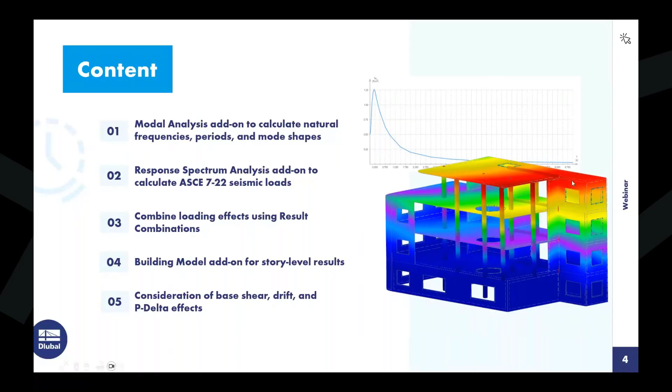So with that said, we will immediately begin within our RFEM 6 program today. When you do create a new file, you are presented here with the base data dialog box where we give it a model name. The type of model will be in a 3D environment. And under the second tab, these are all of the various add-ons that we have available in the program.

For those of you joining us today who are not familiar with our program setup, RFEM 6 is the base program that allows us to fully model our structures where we have access to all the cross sections and materials from all the various standards. We can apply loads and we can run a full static analysis. But when we need a more advanced analysis, like for example today with dynamics, we would need the relevant add-ons.

If we wanted to carry out the design according to the various materials listed here, as well as the design standards, then we would need to activate these design add-ons. So more or less, you create a software package that's specific for your particular design needs. So for today, we will begin without any particular add-ons. We want to work initially within the base program alone.

We will generate the load combinations here according to the ASCE 7, the latest 2022 standard. Notice we also have the NBC standard available here within our dropdown.

For the sake of time, I have already modeled our structure that we will be working with today, but I do want to go over a quick model review. So this is a reinforced concrete structure. We have the material 4000 PSI assigned to all elements that you can see here.

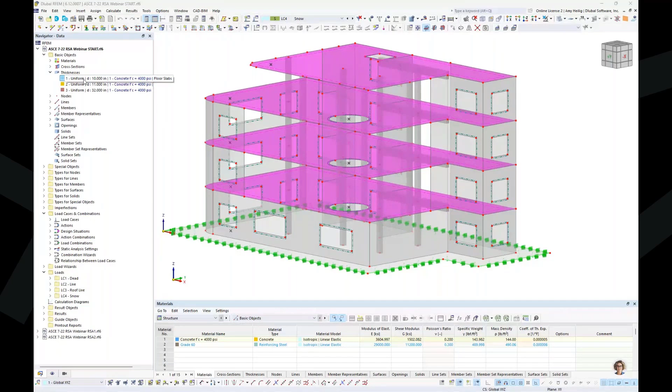So the elevated slabs have a thickness assigned to them as 10 inches, as well as that same concrete material, 4000 PSI. The wall elements are going to be a thickness of 11 inches. And finally, we have our slab on grade element down here at the base of the structure. This is going to be quite a bit thicker at 32 inches thick.

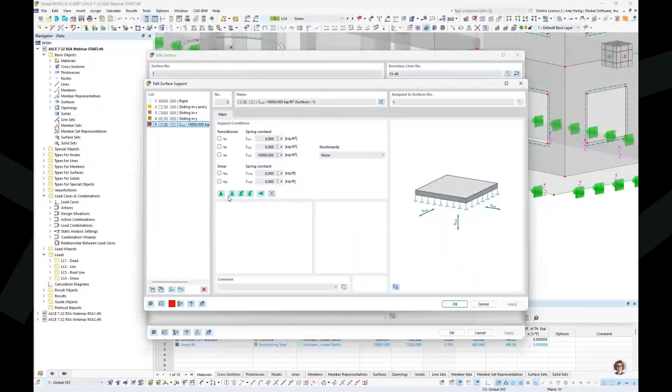Now, we also have our support conditions. So I went ahead and applied a surface support to our slab on grade here, and this is just going to represent the soil stiffness. You can see here, this is applied only in the Z direction with a spring constant here set pretty high. All the rest of the degrees of freedom are released for this simple example. So this would be the information that we would get directly from the geotech engineer.

Now, in the lateral directions, I did apply a line support here only at the boundary lines of the slab element itself. So if we take a look at these particular line supports, you can see that I have restrained them in the lateral X and Y directions.

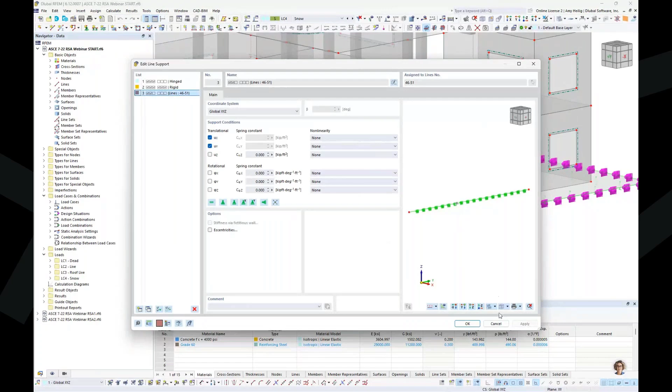All other degrees of freedom are set to release. So this all just depends on your project, and of course the support conditions can vary.

Now that we have reviewed the model, let us take a look at the loading. Within the drop-down box at the top, I have a few load cases already defined where we can take a look at the loads applied to the structure.

For our dead load, we have a simple surface load applied at each level. Same concept for live load, just with a modified magnitude at the lower levels. We also have a roof live load, again accounting for the openings here. And finally, we have a snow load.

With all of these load cases, we are going to take a look at them within our Load Cases and Combinations dialog box. We'll actually be within this dialog box quite a bit today.

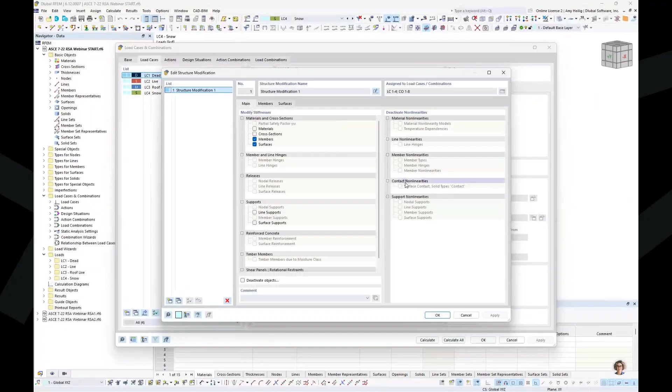One thing I wanted to point out with the load cases: I have an additional structure modification applied here to each load case. This is specific to the ACI standard for members and surfaces, where we can apply the I-crack factor for reinforced concrete to reduce the stiffness for our analysis, again required by the code. I'm not going to go into much detail with this today. We do have previous webinars on both the ACI and the CSA A23.3 that you can refer to.

Now that we have our 4 static load cases here, I'm going to make a copy of my existing dead load case. The reason I want to make a copy is I want all of the loads already applied under the dead load case to also be applied here in load case number 5, which will have a new load case name for our vertical seismic.

I'm not quite ready to jump into the response spectrum analysis yet, but I am going to apply the seismic loads as a static load type to begin with. So we can rename this one to vertical seismic.

I also want to specify here directly from the code, section 12.4.2.2, and in particular equation 12.4-4A, exactly the equation that I will be applying for this load type. So referencing this equation from the code, this will be a factor of 0.2 multiplied by SDS, multiplied further by our dead load. Again, the advantage here is that we are just going to apply a static analysis.

I do want to modify the action category to earthquake load vertical. This just tells the program how exactly we want to combine the load case with the other load cases here based on the ASCE 7.

But the self-weight was automatically copied over here as well. So this is part of our dead load to consider within this equation, taking into consideration the 0.2 factor, and for my example today, the SDS is going to equal a value of 0.72. I multiply those by the negative 1 factor for self-weight. This gives us a value of 0.144.

Now, if you remember too that under my dead load case, we also had an applied additional dead load at each of the story levels that we want to consider for the vertical seismic. So I'm going to select all of the elements within the graphical view here, and we want to double click on this surface load itself to make a modification to the load magnitude.

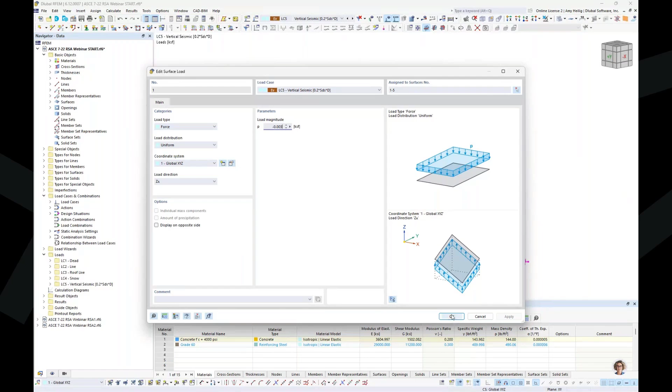Again referencing the ASCE equation, we will take into consideration the 0.2 times 0.72 multiplied by this initial dead load, 0.02, and we're going to get a value here of negative 0.003. So a very small load to consider in the vertical direction. That vertical seismic load is complete.

So you can certainly use the base program alone, RFEM 6, to apply any seismic loads as a static load type if you prefer. But now we want to move into the horizontal, or orthogonal, seismic loads, and this is where we want to activate those particular add-ons.

What we're going to do is visit the Base Data dialog box, which we can access directly within our quick tools. And under the add-ons, as we revisited at the beginning of this webinar, we can go ahead and activate the modal analysis and the response spectrum analysis. So when I click OK, I am going to go back into my Load Cases and Combinations dialog box.

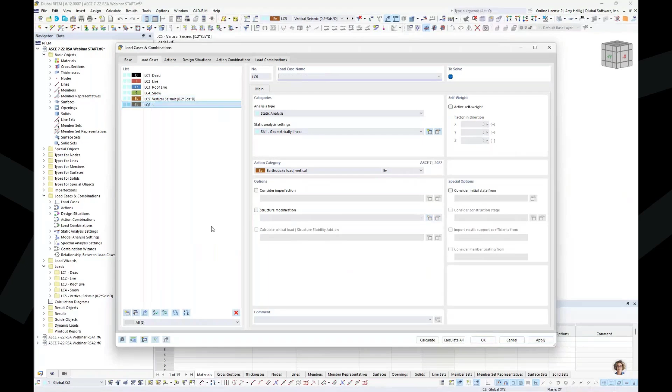We'll begin first with a new load case here, which we'll give the name modal. The analysis type is going to be set to modal analysis. This is available to me because I have activated that specific add-on under my base data.

We'll move through the various settings here. Looking at the modal analysis settings, the method for determining the number of modes is by default set to user defined, which is what we'll use today. Alternatively, I can set the effective modal mass factor to something like 90%, which is required by the code, so the program can determine how many eigenmodes are required. This option is also available for natural frequency. Moving forward today, we will select 10 modes to solve for our initial modal analysis.

As for the method for solving the eigenvalue problem, we've selected the Lanczos solver, available by default. This allows pretty quick convergence and calculates the lowest number of eigenvalues. Alternatively, if we use one of these other dropdown options, you'll see that the root of the characteristic polynomial is the only solver available. With user defined, we also have the subspace iteration. I won't go into detail on these solvers, but you can click the info help button in the lower left, which takes you to the online manual for RFEM 6 to explain the solver types in more detail.

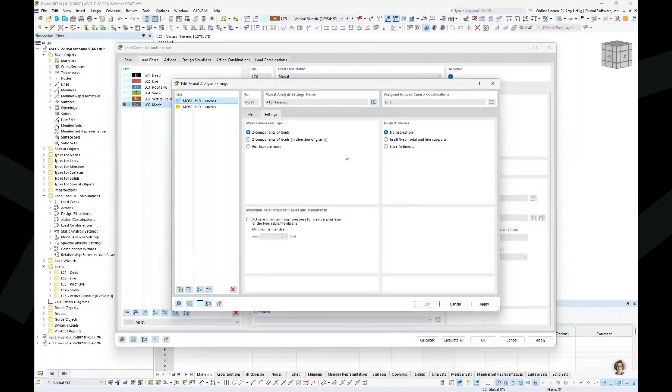Over on the right, we have the ability to neglect masses. I'm not going to neglect any masses right now, but we'll revisit this in just a minute.

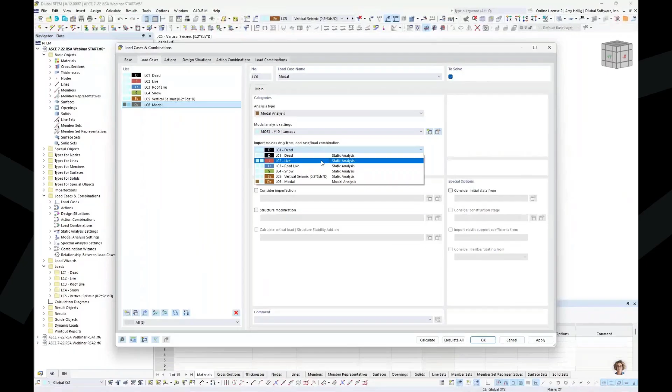Now that we have those settings applied, we have the ability to import masses from a load case or load combination, and you'll see only my relevant load cases are shown. But referring to code section 12.7.2, we're given the effective seismic weight that combines several load cases into a mass combination. We certainly could create this mass combination manually, but we want to take advantage of what the program can automatically create for us instead.

For this, I'm going to jump to the design situation, which is normally used to generate our load combinations. You can see 2 design situations were created for our factored and unfactored load combinations, and we'll get into that topic later on. Right now, I'm going to create a third design situation, and in my dropdown box, I'll scroll all the way to the bottom where I have the option for effective seismic weight.

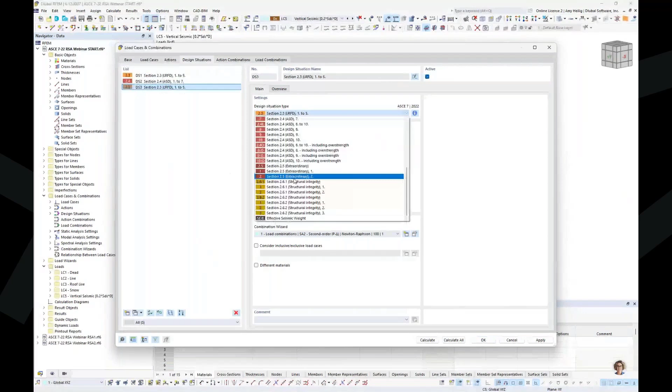This references ASCE 7 directly to create that mass combination for us, considering dead, live, roof live, and snow. Now when I jump to the load combinations, we can see the mass combination generated automatically. The problem here, though, is that I don't see the roof live load considered.

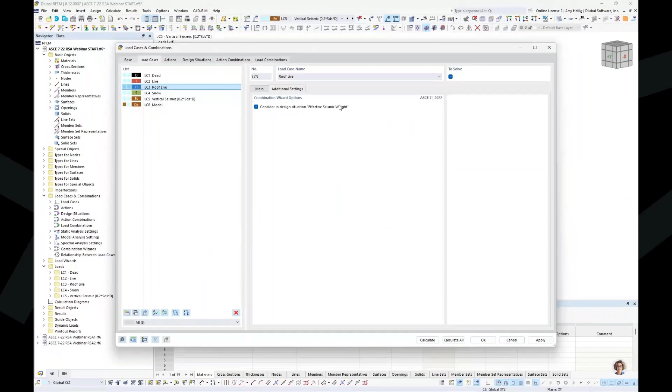The reason for this is that the roof live load could be optional within the code, depending on our project or specific settings. So under the load cases, if you visit the roof live load, under the additional settings we have a checkbox to consider it within the effective seismic weight mass combination. Now the program will regenerate that mass combination for us, and sure enough, we see all the relevant load cases with the applied factors that will be used for our mass conversion.

So going back to the modal analysis, we can now use our drop-down box to select that mass combination directly. Okay, so now that we have created all of the input settings for the modal analysis directly, we can go ahead and just run this calculation quickly.

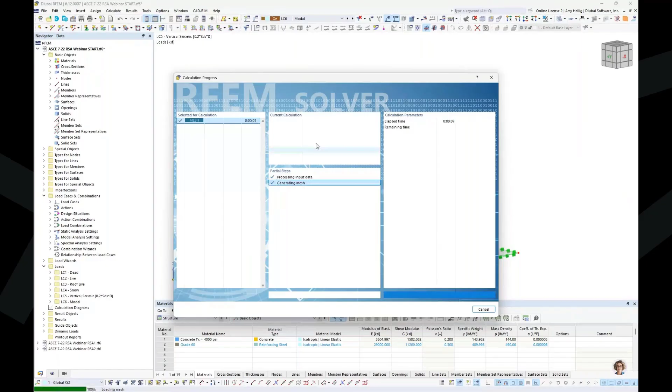You'll notice the first thing the program does is generate the mesh for all of our elements in the background. Considering all of the openings, the mesh looks quite nice. Then we calculate through those 10 different eigenmodes that I had set within those settings, so the program will take a look at the natural frequencies for each one. We are converting the masses from that mass combination to take into consideration with the modal analysis.

Once this calculation is complete, we are presented with the results. We might make some modifications here graphically just to better see our results. For example, we can turn off the FE mesh up here within our quick tools. Also, the members are represented by one-dimensional lines. If we want to change that, over here within the navigator, we can select the members under the deformations to change these to cross sections rather than single line elements.

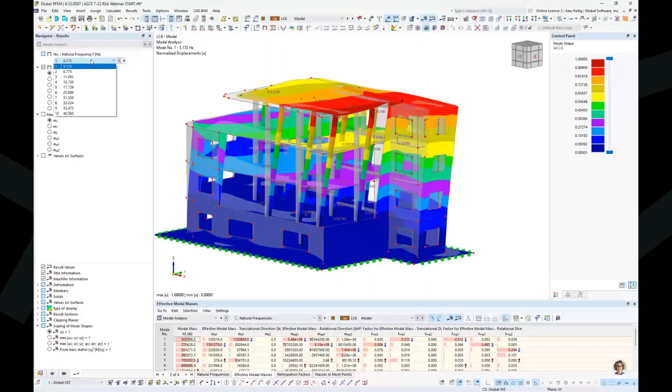So currently we're viewing the mode shape, and within this dropdown we can take a look at the 10 different mode shapes we have solved for, and we'll see the structure response adjust accordingly. The scaling of the mode shape is also set down at the very bottom of our navigator. By default, we scale them to a factor of 1.0, considering the translational directions, but you could make modifications to this if you see fit. Again, we probably won't—we'll typically leave this as the default scaling.

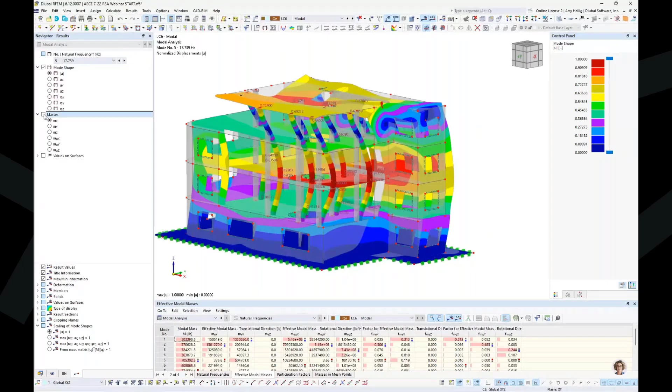So in addition to the mode shape, we can also activate the display of our masses. And if I zoom in and maybe turn this into wireframe view, we can also decrease the size of the masses. This is showing us at every single FE mesh point exactly the masses we are considering for this modal analysis from that mass combination.

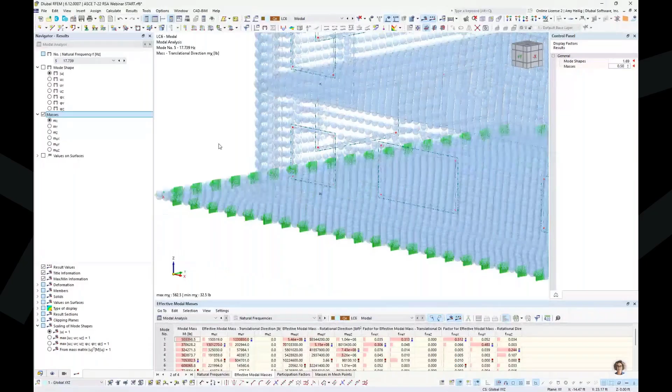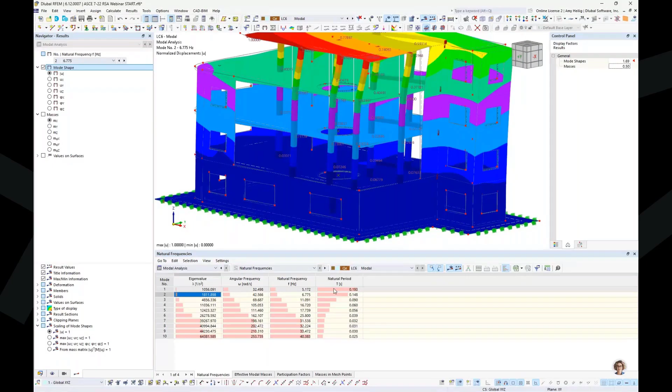In addition to our graphical results for the mode shape and displaying of the masses, we also have our table results. We use our dropdown to set this to the modal analysis, where those 10 different mode shapes are shown, along with the relevant angular frequency, natural frequency, and natural period. The second tab is going to be very important for us because it tells us our total mass participation for those 10 different mode shapes.

So when I look at the mass participation in this last row, in the X direction it's 57%. In the Y direction it is 55%. And when we refer to code section 12911, this tells us we need to meet a minimum of 90% mass participation. So we're quite a bit away from this value.

So there are a couple different approaches we can take to modify this to try and reach that 90%. The first is to simply solve for more eigenvalues. The problem, though, is that we have a pretty thick slab here with not only self-weight, but also the additional applied loads to this structure, and that mass is feeding directly into these supports. So for this particular structure, it's going to be hard to reach that 90% when we are considering this slab.

So this might be a scenario where we want to deactivate the mass from the slab element directly. Now, this could also be useful if you have a structure with a lot of members and a lot of what we call local modes with not much mass participation going on. Perhaps we want to deactivate the mass from those individual elements and instead kind of bunch them together into a single mass.

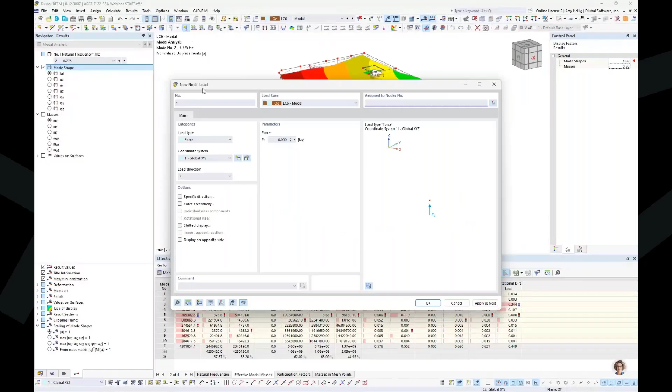We have what we call mass loads available as well. So up here within our tools, we have the ability to always apply something like a new nodal load set as a force, but in this dropdown we can always apply a mass load as well, and this would be taken into consideration within this modal analysis. This is available not only for point loads, but also member, line, or surface loads.

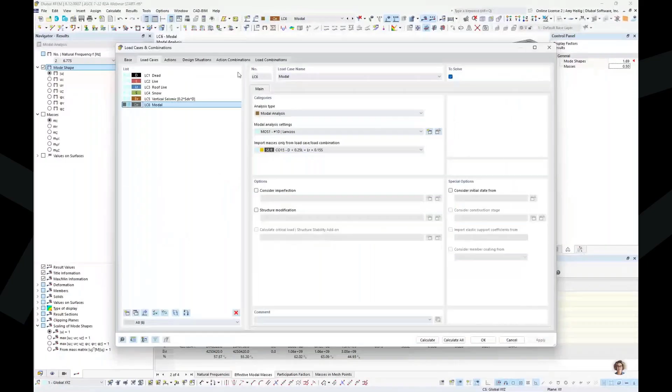Now, again, for our example today, what we're going to do is jump back to the modal analysis, and we'll go back to the settings here where instead of neglecting no objects, we want to change this to user defined.

I'm going to select a surface element and graphically select this slab. This is surface number 1. I could directly type it in here as well.

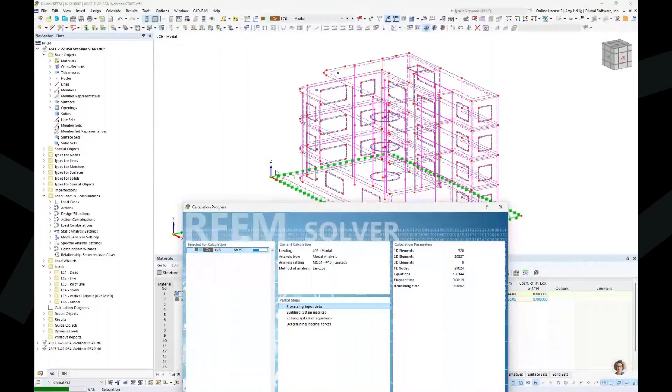We will neglect the masses in all directions. I click OK, and the program tells me it needs to delete the results, since essentially I want to run through this calculation again. This is identical to what we calculated previously, so the program doesn't need to regenerate the FE mesh. We did not make any modifications to the geometry of the structure itself, but rather the only thing we did was neglect the mass in that slab element—so self-weight, dead, live, and any other applicable loads that were converted to mass.

We are still solving for a total of 10 different modes. So once this is done with the calculation, we immediately jump to the table and we see here in the X direction, we have 94% mass participation, and in the Y direction, 91% mass participation. That looks quite good—that's exactly what we want to meet at a minimum, so this is sufficient for our modal analysis.

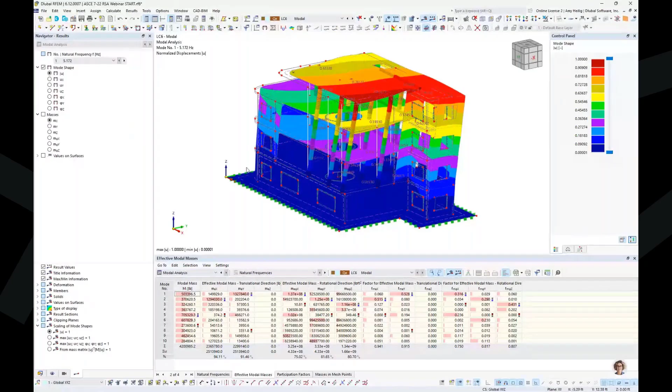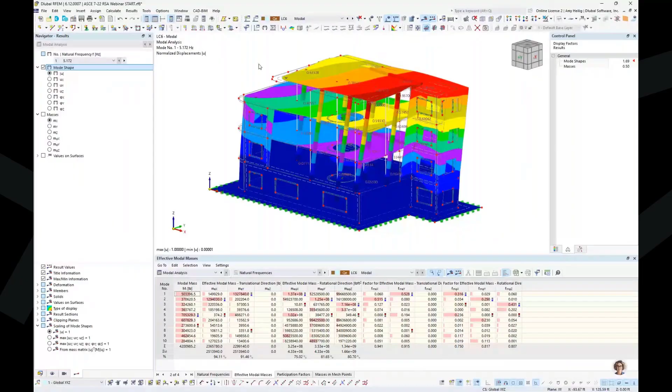What else you could verify is if we activate the display of the masses, you'll notice we have no masses now on our slab element. So now that the modal analysis is complete, we have the required mass participation of 90% in the orthogonal directions. We want to move forward now with our response spectrum analysis.

Before we create this new load case for the response spectrum analysis, I'm going back to this base tab where we generate our load combinations according to ASCE 7, but we can activate the parameters here. For the first part of this example, I want to emphasize that we want to consider the same redundancy factor in both directions, X and Y. Alternatively, if we weren't working with redundancy but rather overstrength factors, this would also be applicable—same workflow. This first line is where we set what that redundancy factor is. The additional lines in X and Y are completely irrelevant and can be ignored for this first part of the example.

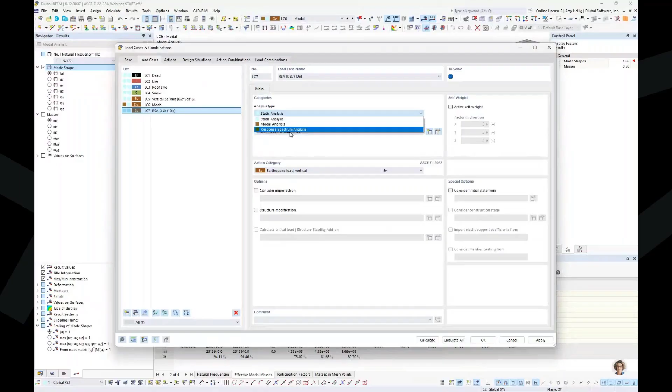Assuming we have the same redundancy factor of 1.0 in both directions, or with overstrength the same factor in both directions, under the load cases I'm going to create a new load case and give it the name RSA for response spectrum analysis. I want to emphasize that we are going to put both the X and Y response spectrum analysis in this single load case, because the redundancy factor is the same in both directions. In my drop-down box I choose response spectrum analysis, since I have that add-on activated, and we can see the settings adjust automatically—the spectral analysis settings.

When we finally run our response spectrum analysis, we're going to see our 10 different mode shapes. And when we apply the response spectrum analysis, we then get 10 different results in the X and 10 different results in the Y. So we need to somehow combine these so that we get a single result in the X and a single result in the Y.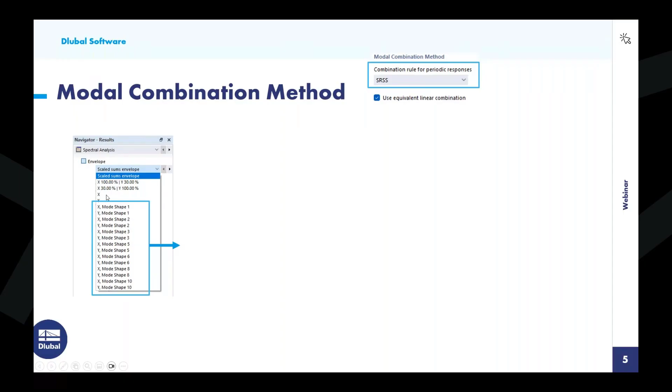We do so within this drop-down box by setting either the square root sum of the squares—the equation is shown here, pretty self-explanatory—or the complete quadratic combination, the CQC. You can see the modified equation here; a big difference is this correlation coefficient epsilon, where we can consider damping. The third option is the absolute sum, again probably not utilized too often. Most likely, for following the code, we will set this to the SRSS or the CQC.

Once we have applied one of these rules, we will see a single result in the X and a single result in the Y for our response spectrum analysis. Now, a problem though with the SRSS or CQC combinations is that the corresponding internal forces are lost—we see this because we take the square and then the square root. So in our results of the single X and Y direction, we may over-design our structure because we're going to consider the max internal forces.

So for example, a member, we will consider the max moment along with the max axial force and max shear force, and we know in reality these max forces are not all going to occur at the same time. So what we do to alleviate this is to activate this equivalent linear combination. This is going to give us more realistic results and the correct signage.

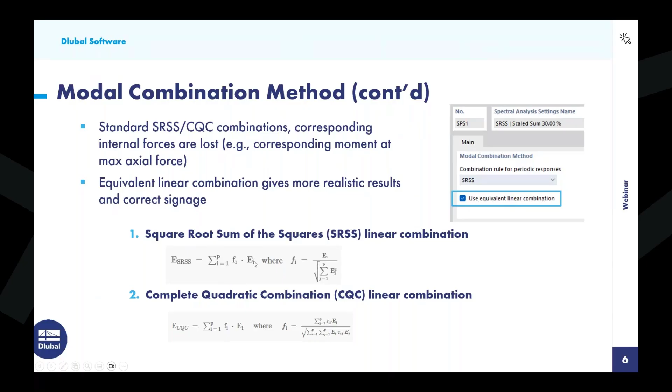Moving on now to that second dropdown within the same dialog box, this is the combination of the directional components setting. I want to emphasize here that this is only applicable when we have both the X and the Y response spectrum analysis in a single load case. This will make more sense as we move through our example today. But again, we do have the scenario of X and Y in a single load case.

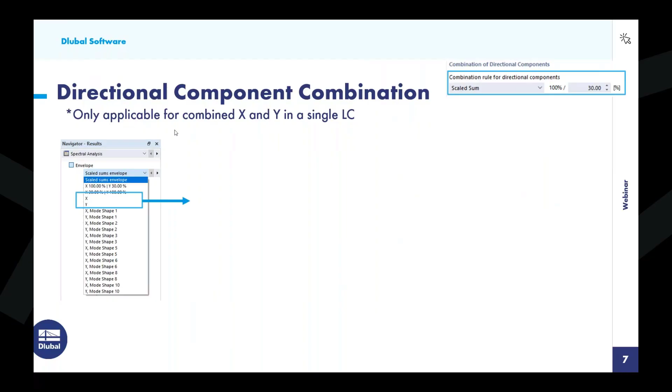We saw from the previous slide, we now have combined to get a single result in the X and a single result in the Y. Well, we know in reality, earthquakes don't necessarily happen in just the X or just the Y. So how do we further combine these together? And this is what this second dropdown is going to give us.

We have the option to once again combine using the SRSS rule given here. But most likely we're going to choose this scaled sum, and for this is the 100-30 rule. We reference the code, in particular section 12.5.1.2, where we will take 100% of the X forces combined with 30% of the Y, and vice versa, 100% in the Y, 30% in the X.

The third option, absolute sum, we would take 100% of the X and add it to 100% of the Y. Again, probably not used so often. Most likely we are choosing the scaled sum. So what we'll see in our results then is the program automatically combine these together, just like what I mentioned with the 100-30 rule, 100 in X, 30 in Y, and vice versa, 30 in X and 100 in Y.

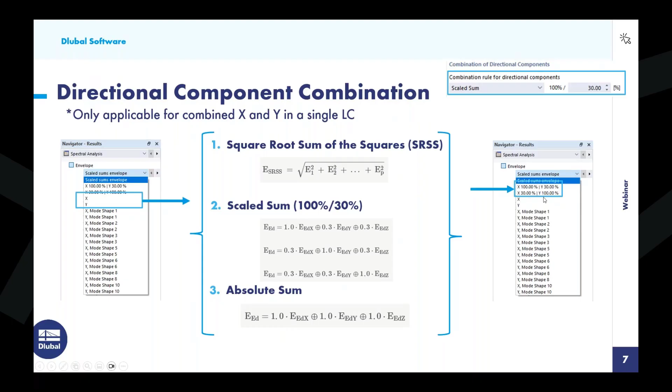Okay, so going back to RFEM then, we want to choose our first dropdown here for the periodic response combination to SRSS. Notice that when we do select CQC, damping is available to us. We will want to turn on the equivalent linear combination.

And then as far as combining here, the directional components, we follow the ASCE 7 to set this to the scaled sum for the 100-30 rule. And now we just continue to move on down this list.

We do want to import the modal analysis from load case number 6. We only have one modal analysis load case. This is nice though in RFEM, that if you want multiple modal analysis load cases, you can do so. Perhaps if you're playing around with the different masses and you want to test out some different scenarios, you can do so.

The action category is automatically set to horizontal earthquake forces from the ASCE. Again, this will help combine these later on into load combinations and result combinations.

We also have the ability here to consider accidental torsion. So this comes from the code, section 12.8.4.2, that if our structure maybe has a non-flexible diaphragm, if we have irregularities, we may want to consider this additional accidental torsion with our seismic loads. And this is 5% of the building length in both directions.

You can see the building length is automatically determined by the program. You could also override that if you would like.

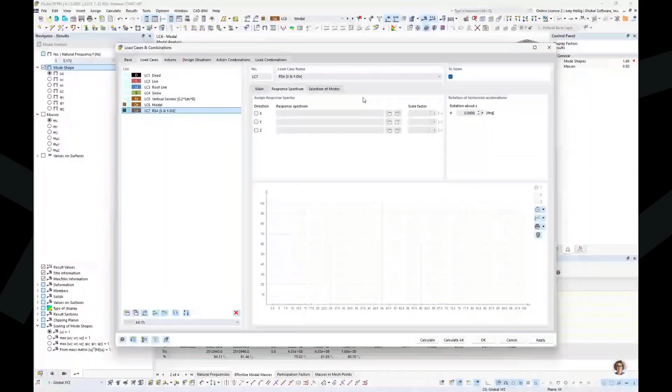The response spectrum, remember, we are combining X and Y. Therefore, we activate the response spectrum in both the X and the Y directions. Z has already been taken care of in the static load case, so we'll leave that turned off. Now, by default, the program will go ahead and create the response spectrum type according to the ASCE 7 for a 2-period as listed here.

So I'm going to go back to the PowerPoint to discuss this in more detail, the design response spectrum in section 11.4.5. Today, we will be focusing on the multi-period response spectrum from 11.4.5.1. As most of you know, this was a pretty significant change within the 2022 standard, introducing this multi-period response spectrum that has 22 response periods, compared to the previous 2-period response spectrum, which is still offered in section 11.4.5.2.

So you can see the difference in those response spectrums on the right-hand side. This was taken directly from the ASCE 7 website, linked here at the bottom. This is just a helpful article that explains the multi-period a little bit further. It certainly looks a bit different here when we look at the response spectrum itself. This was introduced for improved accuracy, especially for soft soils or structures with long periods.

This article also states that when we are running a modal response spectrum analysis from section 12.9.1, which is what we're doing today, we are required to run this multi-period response spectrum. We get this information directly from the ASCE hazard tool. I've linked it here, and we'll certainly be utilizing this today to pull that USGS seismic design data to generate this response spectrum.

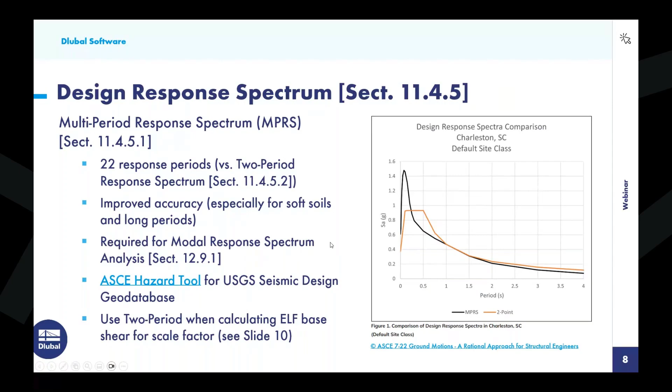Okay, so I'm going to go back to RFEM, and we're going to create a new type here set to user defined. We could even rename this — we'll call it ASCE 7, again the 2022, but this is going to be the multi-period. For this information, we are going to visit the ASCE 7 hazard tool.

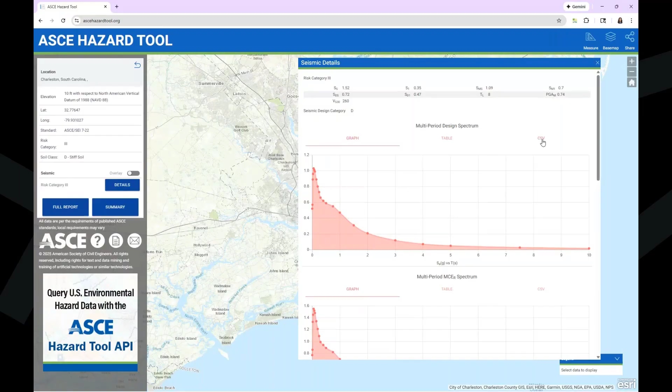I've already input my information here for Charleston, South Carolina — we're just using that same example from the ASCE. I have a risk category set here, soil class of stiff soil, and we get our data shown to us directly on this website. We also have the ability here to generate a CSV file. So we open the CSV file in something like Microsoft Excel, and it's quite simple — we have our 22 periods shown here with the relevant accelerations.

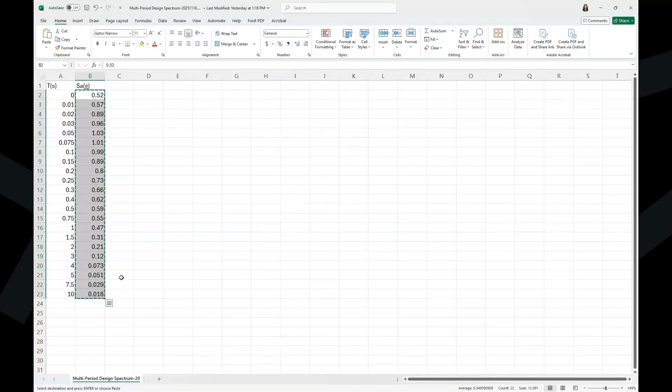So I'm going to take these period values and simply hit Control-C. I go back to RFEM here, click in this first cell, and hit Control-V. Now everything is red right now, and that's just because we need to go back to the Excel file and do the exact same thing with our accelerations. So we'll highlight all of them, Control-C, go back to RFEM, click in this first cell, and Control-V. Now we see this exact same data populated here within RFEM.

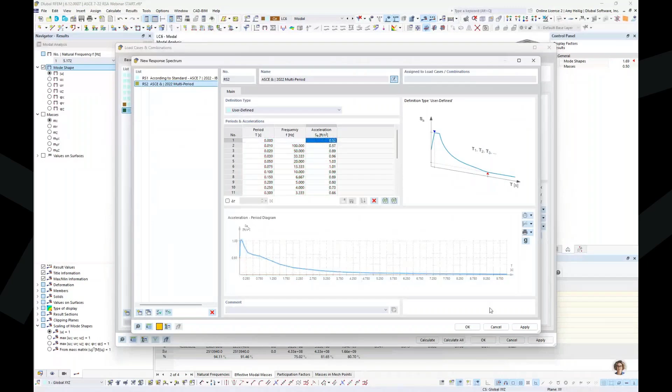So I can click OK, and then I want to ensure that I select this multi-period here from my dropdown rather than the 2-period. We also have this scale factor, and this scale factor is going to come into play several more times in the rest of this presentation.

But to begin, I want to discuss the modal response parameters in code section 12.9.1.2. If we are applying this response spectrum analysis for force-related design — so story drifts, support forces, or member forces — the code tells us we need to take this response spectra, in our case the multi-period, and divide it by the response modification coefficient, further divided by the importance factor. If we're using this response spectrum analysis for displacement-related design — so displacements or the structure's overall drift — we need to once again take that response spectrum, our multi-period, and multiply it by the deflection amplification factor divided by the importance factor.

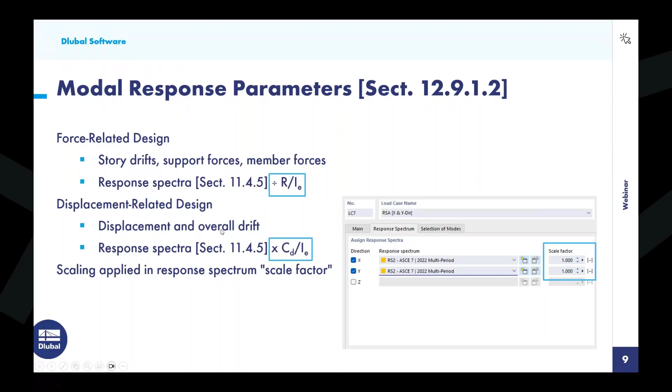So we might be wondering, well, how do we take these factors into consideration? We do so directly with this scale factor input. For example, if we are doing the force-related design, we would multiply here I sub E over R, or we could take the displacement-related and multiply C sub D over I sub E.

Okay, so we'll go back here to RFEM to carry out the rest of our input for this response spectrum. Again, that scale factor is shown here. We'll leave this just as 1.0 for our example today.

The final tab is the selection of modes. We have our 10 different mode shapes here from that modal analysis. One efficient setting might be to activate the ability to not consider modes that aren't really contributing a whole lot to the mass participation. The default value set here is 0.05, but you can make modifications to that.

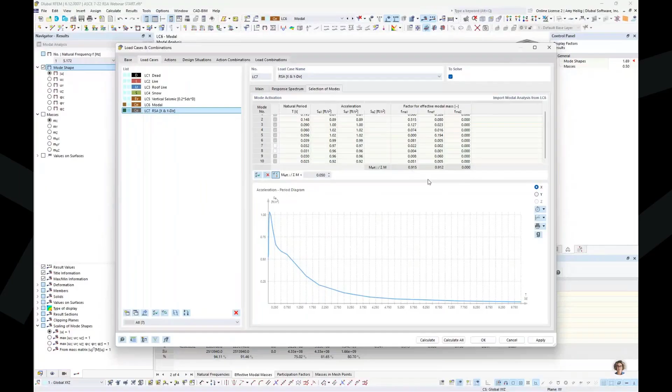The reason why is if you have 100 modes that you've solved for, there may be many that really aren't contributing too much. This speeds up the calculation and decreases the amount of result output, but we always want to make sure we're still meeting the mass participation. For my example today, we could deactivate modes number 7 and 8, and you can see we're still meeting that 90% mass participation in both directions. That looks quite good.

Okay, so now that we have input all of this information, we're ready to run our calculation. This will take just a minute to solve, so I'll go ahead and toggle here to a model where we have already run this calculation, where we can directly look at our results in RFEM. Once that calculation is complete, I'm looking at that same load case for the response spectrum analysis.

You can see here within my dropdown exactly what I explained in the PowerPoint. We have all of our different mode shapes here in the X and Y direction. We're combining according to the SRSS rule to get a single result in the X and a single result in the Y. And then we can further take a look at the 100/30% rule applied to both the X and Y direction.

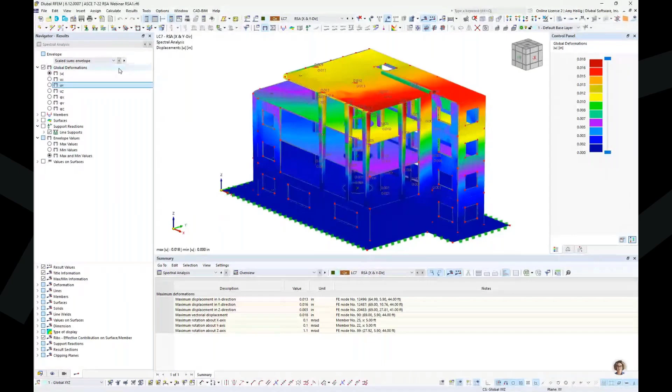One thing is that the default option up at the top is this scaled sums envelope. So we don't have to worry about what's the worst case scenario with 100% in the X versus 100% in the Y. The program does this automatically for us and gives us an envelope solution considering all the options within this list. With this scaled sum envelope, we're currently looking at the global deformation. We've already applied the seismic loads to our structure and run the analysis, so now we're looking at the actual results from the horizontal seismic loads only.

Now, because this is an envelope solution, we have this option here to view both the max and min values graphically together, or we could view just the max values or just the min values.

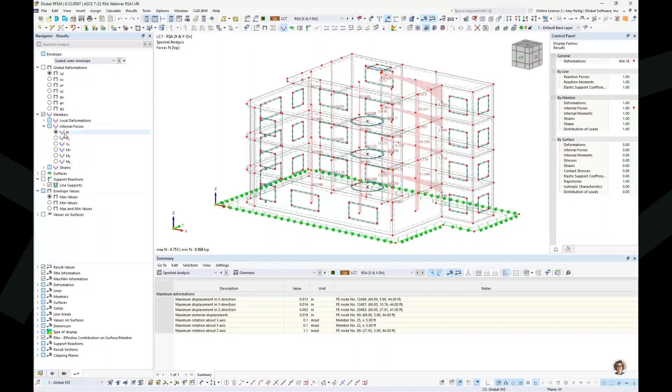In addition to the global deformation of these seismic loads, we're probably also interested in the internal forces here for something like our member elements. So we can activate the axial forces, view the shear forces, or maybe bending moments of both the beams and the columns.

In addition, we're probably also interested in the internal forces for our surfaces. So I could take one of the elevated slabs here and create a user-defined visibility, and we can activate the bending moments of this first level slab in the X direction, or take a look at bending moments in the Y direction, and so on.

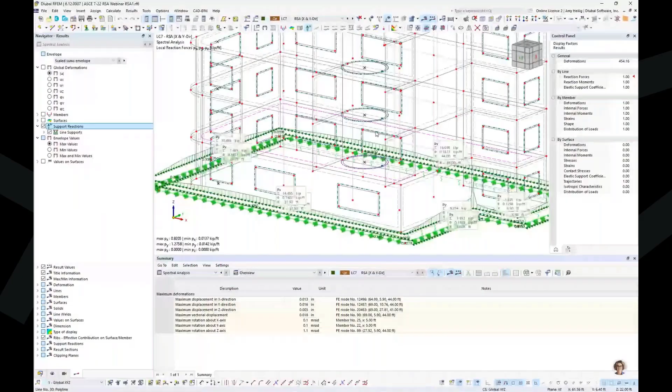In addition to the members and the surfaces, we also have our support reactions. So I'll cancel out of this visibility, and what we should see are the support reactions here for the line supports only. I have no vertical load, so I'm not going to see any response or support reactions in the vertical direction, rather only the horizontal directions from the line supports themselves.

In addition to viewing everything graphically, we can jump to the spectral analysis here in the table results, and we can view the internal forces of the members or the surfaces or the results by the line, for example. So here are those same support forces that I'm viewing graphically. You can kind of see the red arrow there, syncing with my table output.

We can export this to Microsoft Excel with the click of a button directly here within the table if we like. So again, for further sorting capabilities, everything is available to us graphically here, but also within this table format.

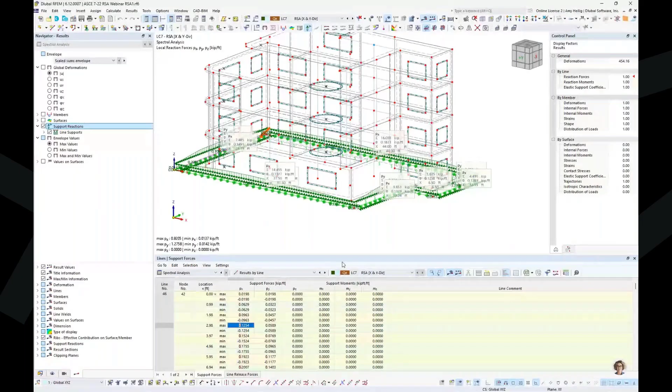So now that we have carried out the results here for our seismic loads, we're likely wondering, okay, well, how do we combine now with the other load cases? So when I jump to the design situations, you'll see here again that the program creates these two design situations: factored load combinations from the ASCE 7 and unfactored load combinations.

So these are more or less just grouping together all of our load combinations. We can view these load combinations here under the last tab. And when I take a look at my factored load combinations belonging to that first design situation, I really don't see any of the earthquake forces listed here.

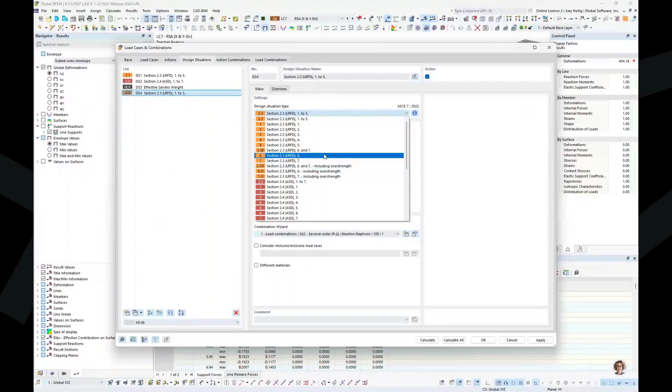The reason why is because we need to go back to the design situations and create a new definition type. We've separated out the seismic load combinations into additional design situation options in this dropdown. We see numbers 6 and 7, which reference the ASCE 7 directly for the redundancy factor, but we also have 6 and 7 including overstrength, if we were taking that approach instead. So I modify this to 6 and 7, click on the info button, and I see the relevant load combinations given directly from the ASCE 7, also with that redundancy factor.

I want to do the exact same thing here, but apply this for my unfactored load combination, so 8 through 10. Again, we also have overstrength available in this list. So I've now created these two design situations, and I jump to my load combinations, and now I see quite a few more load combinations generated here as well.

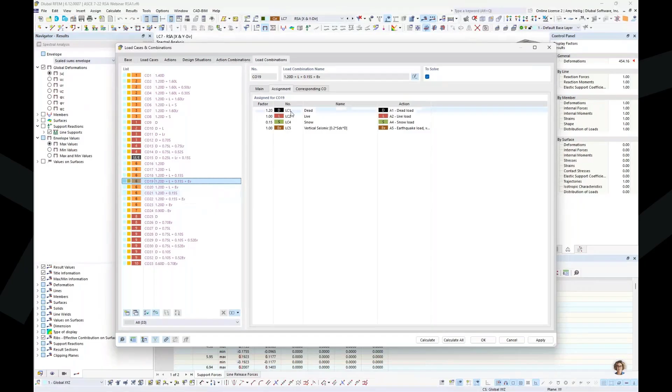The problem, though, is that only the static vertical seismic forces are included in these load combinations. I don't see anything to do with my response spectrum analysis. The problem here is that with load combinations, we take all of the loads at once and then run the calculation. This is what allows us to take into consideration second order effects like P-delta, or even third order effects if we had cables or fabric membranes.

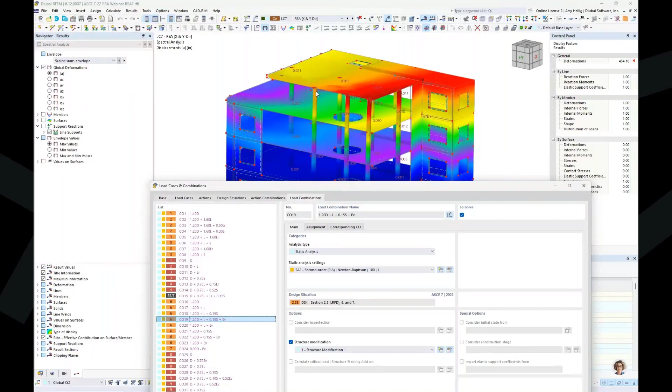Well, if you remember from our response spectrum analysis, we already have the results available to us. So instead, in order to combine these with the other load cases, we have to do this linearly, according to first order analysis, through what we call our result combinations instead.

So back under the base tab, I'm going to activate the result combinations. What you'll see is that we get a new tab available here, but it's still empty. The reason why is because under the design situations, we're currently still generating those load combinations.

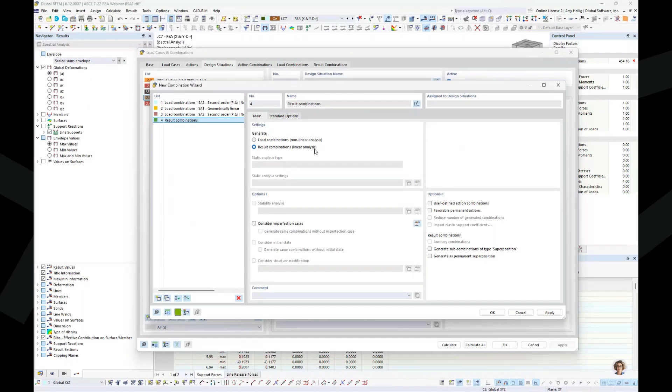We're going to go in here instead and create a new definition type for the combination wizard settings and toggle this now to result combinations. It clearly also states linear analysis. We cannot combine second order effects to the results of other load cases or combinations with second order effects. You cannot just sum them up, it will essentially provide incorrect results. This is why we always have to do this linearly according to first order analysis.

So now that this particular setting has been defined, what we can do here for both of these design situations is toggle to the result combination. Under my last tab here, now I'm finally seeing exactly what I would expect. I see my horizontal forces with this particular load case combined with the vertical, as well as the other load cases.

Now, you'll also notice here for that response spectrum analysis within this dropdown, the scaled sum envelope is listed. We could toggle this if we wanted to, 100% in the X versus 100% in the Y. But remember, the scaled sum envelope is going to be the worst case scenario, the envelope solution of all of these options listed here. So we'll likely leave this as is.

So now that we have all of the information defined here with result combinations and design situations, we would be ready to move forward with possibly the design of our structure. So for today, maybe we activate the concrete design add-on and move forward with design according to the ACI. Again, there are previous webinars that go into a bit more detail related to this.

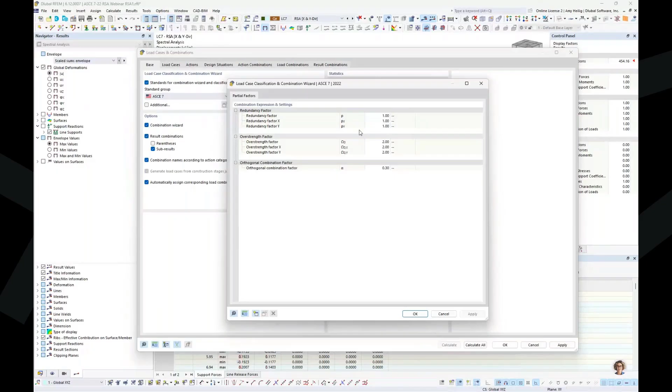So sticking with the response spectrum analysis, we want to move into the second part of our example today. If you remember, under this base tab we have the redundancy factor that was considered the same in both directions. It could be quite common though that we have a different redundancy factor in the X versus the Y. Same concept for overstrength. It just depends on our structural system if this is applicable to our design.

So I do want to move forward with assuming here that we possibly have a redundancy factor of 1.3 in the X direction while keeping a factor of 1.0 in the Y direction. So now this first line is completely irrelevant.

We are now focusing on these two separate X and Y directions here. Again, same concept with overstrength. This final line here will come into play with the 100-30% rule, so just keep this in mind. This is currently set at 30%. We'll talk about this in just a minute.

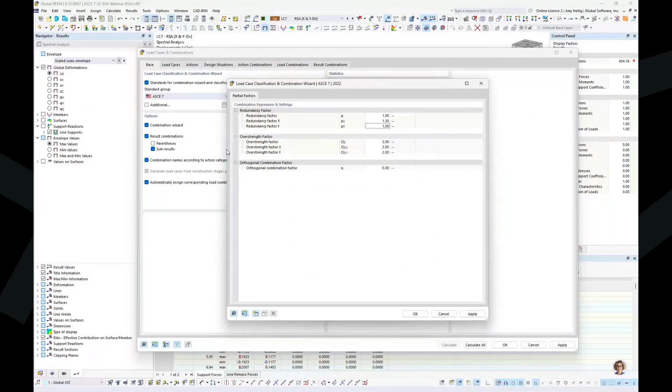So with that said, the problem now: if I go to my load cases tab here, I can no longer consider X and Y together in the single load case. I now need to separate these out into two separate load cases.

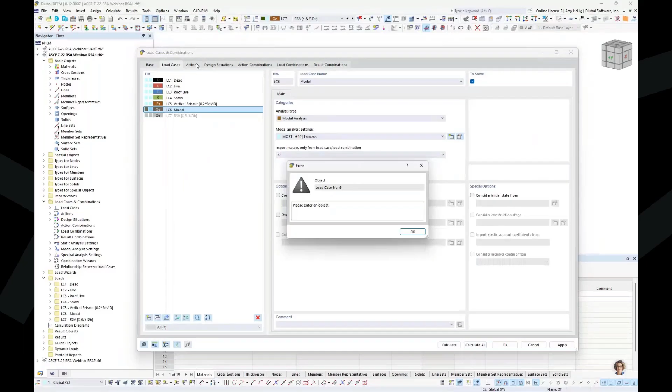So the first thing I want to do is deactivate this previously created load case. It's not enough just to uncheck here to solve — that will just make sure it's not solved for when we calculate all. But in order to remove it from the actual load combinations or result combinations, under the Actions tab, I want to select the horizontal earthquake forces and uncheck active here. So now it's completely taken out of the load combinations as well.

I will take this load case and create a copy here. We'll go ahead and activate this one, and we're going to make some modifications, beginning with the description. This is the response spectrum analysis only in the X direction. I'm going to make a copy here and rename this second load case the response spectrum analysis in the Y direction.

Now, going back to this input information under this first tab, really everything stays the same, so no modifications are needed here. But under the response spectrum, we want to ensure that we apply the response spectrum in the X to the load case with X, so we'll uncheck the Y direction. Same concept for our load case in the Y — we want to apply the response spectrum in the Y direction only. So now there are two separate settings here for each of those load cases.

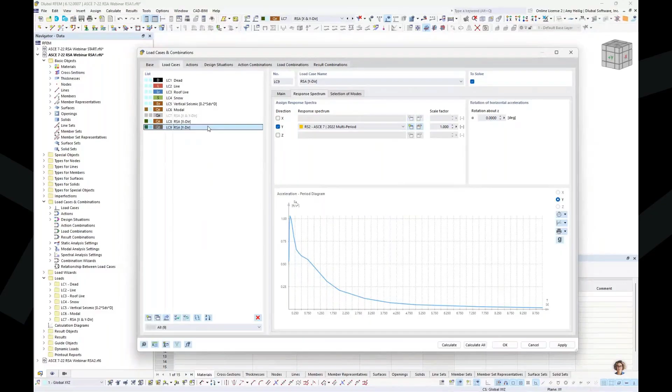In addition, we now are going to consider this bottom setting, the additional settings X and Y independently. Remember, previously this had no impact, but now because we have X and Y in independent load cases, we want to go ahead and activate this for both of these load cases.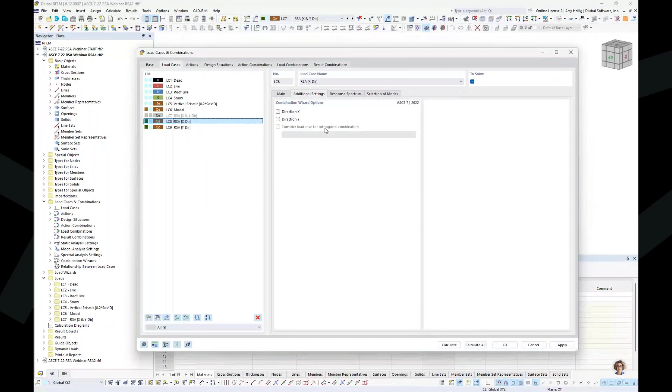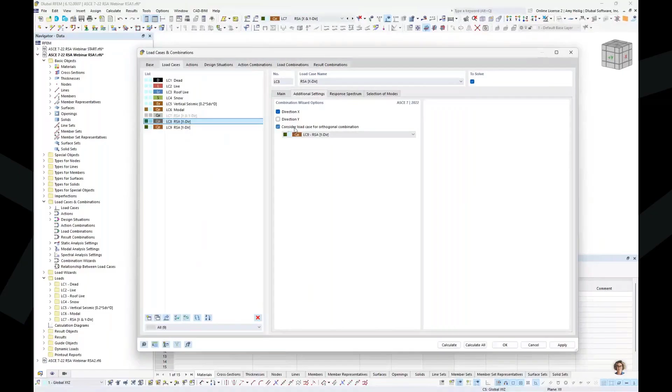And now we get a new tab available here. This is going to apply the X and Y load cases into our result combination, considering that 100-30% rule. So we activate here direction X with the load case X, and direction Y with the load case in the Y direction. So now we can tell the program: consider 100% of the X with 30% in the Y, and vice versa.

And you might be thinking, wait a minute, back under the spectral analysis settings I'm already considering the 100-30 rule. But remember, this is only applicable when we have X and Y in a single load case. This is completely ignored now. Instead, we are referring back to this combination factor of 0.3, which is essentially going to apply the 100-30 rule required by the code. That will make more sense when we get into the result combinations.

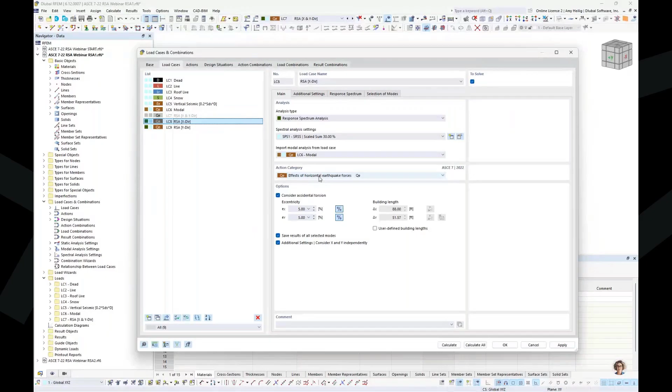So now that this information is complete, everything we've done in the first part of this example is still relevant. The only thing we can do here is go visit our result combinations tab to view these in more detail. And sure enough, we have these individual load cases. Notice our drop-down looks a little different — we no longer have the 100-30 rule in the sub-results, and we don't have the scaled sum factor. We only have a single result in the X and a single result in the Y.

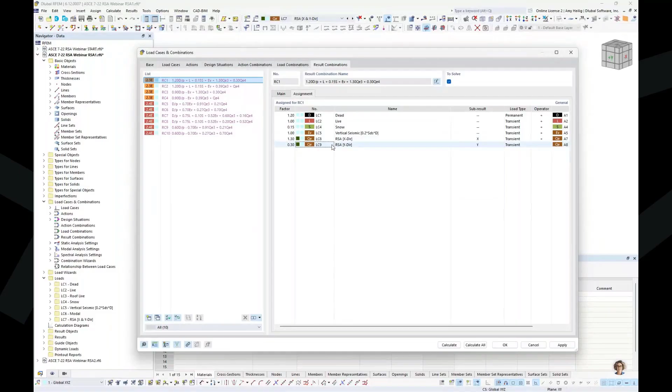In this first result combination, I'm applying 100% in the X, 30% in the Y, but remember I modified my redundancy factor in the X direction to 1.3, so that's why I see that relevant 1.3 factor here. Looking at my second result combination, I'm applying 100% in the Y and 30% in the X, but when I consider that redundancy factor of 1.3 times 0.3, I get 0.39. So everything is combined automatically in the program according to the code and the various factors. But again, if we have different redundancy or overstrength factors, we do need to split those apart into two separate load cases.

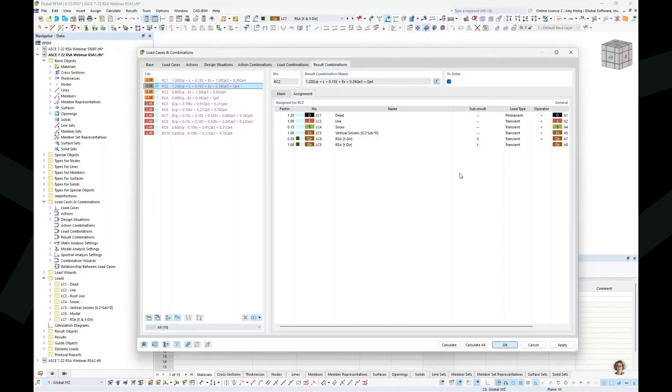Okay, so the final topic for today is going to be the scaling of our base shear. And for this, I'm going to jump to the PowerPoint to refer to section 12.9.1.4 from the code. In particular, 12.9.1.4.1 talks about the scaling of forces.

The code tells us that we need to consider the base shear in two orthogonal horizontal directions, X and Y, and that's certainly what we did today. From the program, we need to get the base shear from this response spectrum analysis from the combined response. I will show you in just a minute how we can utilize the building model to get this information about base shear.

We compare this value from RFEM to the base shear that's calculated from the equivalent lateral force procedure, section 12.8. This is done outside of the program. But if we find that this base shear from the equivalent lateral force procedure is going to be greater than the base shear that we're pulling out of RFEM, then we need to scale our forces by this factor, V over V sub T. So this is essentially something we need to keep in mind with the scaling of the forces.

Now, the scaling of the drifts from 12.9.1.4.2 includes the seismic response coefficient, the effective seismic weight, and if that same base shear we're getting out of RFEM is less than CS times W, we need to also scale our displacements by this factor, CSW over V sub T. Now, again, we might be wondering, how do we take into account these specific factors?

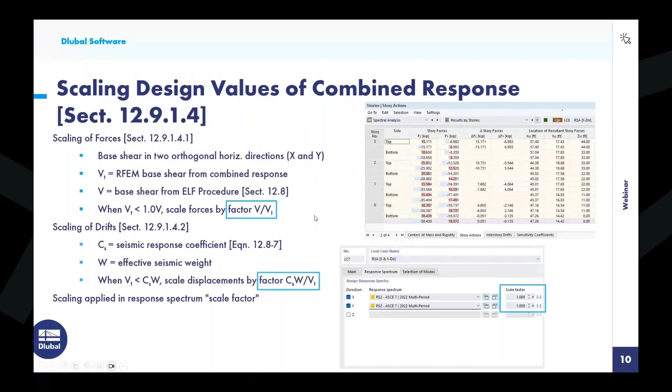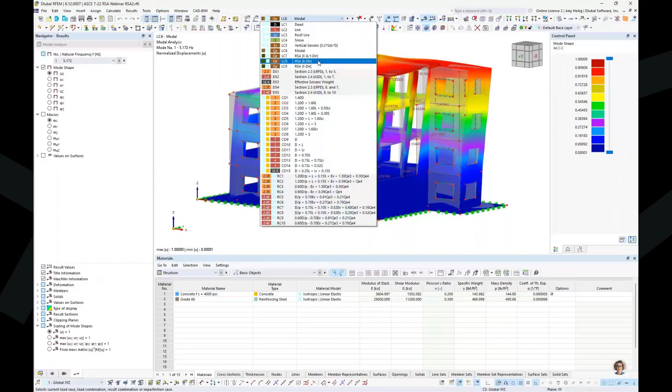Going back to RFEM now, I want to quickly show you how you can activate the building model add-on. For this, I am going to jump to an already saved model here where I went ahead and ran the calculation for these two separate load cases in the X versus the Y that we just talked about. We can visit our base data dialog box, and under the add-ons, we can activate here the building model add-on.

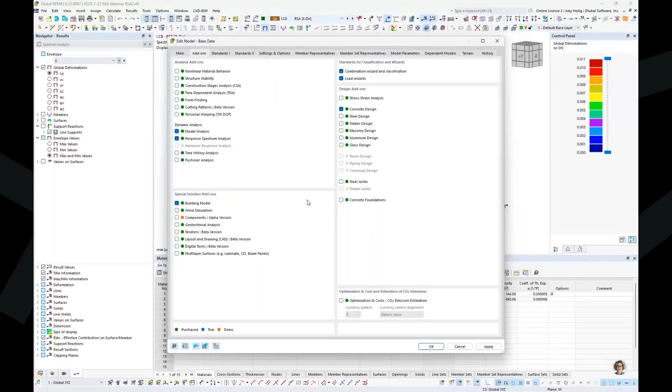RFEM is a general FEA program. We are not restricted to modeling buildings in this program. We can really model everything. But the building model add-on is really efficient for defining this more building-specific data in this general FEA program.

Back under our Navigator data tab here, when I collapse all of these folders, we now have a new one called the building model add-on. And I go ahead and create a new building story. So now in this general FEA program, we have the ability to define story levels. The program automatically creates our first story level at 11 feet. That's great. I'm going to go ahead and create the additional story levels at the additional locations here.

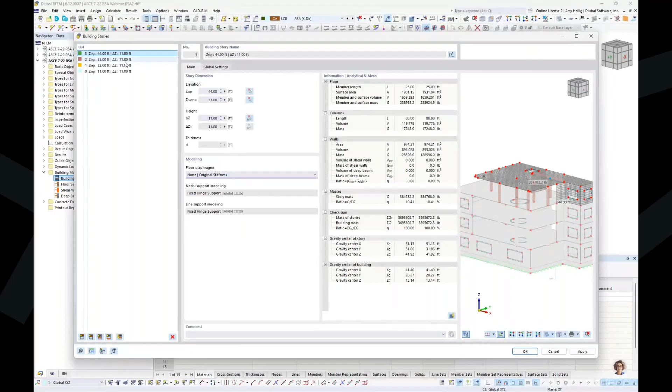Now, everything highlighted is essentially attached to this story level. The building model add-on also gives us the ability to define diaphragms like flexible, semi-rigid, or rigid. Not getting too much into the details today - we have previous webinars that dive a little bit more into this, but the specific purpose right now is to define these specific story levels.

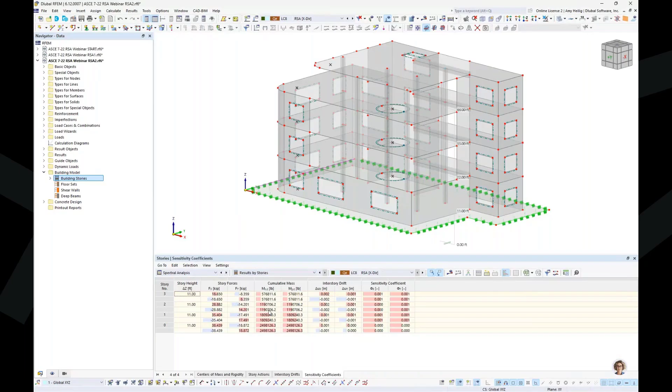So when this information is input, what I can do here is jump down to the spectral analysis results. This is my response spectrum in the X direction, my results here in table format. Now because we have enabled the building model add-on, we get a new option here called results by stories. Within this first tab, this will actually show us the center of mass at each story level. If we had a rigid diaphragm, we would also see the center of rigidity given here.

The second tab is where we can pull out the base shear information. So quite easily, we just refer to this table. The program automatically outputs this base shear here in the X direction. I'm currently looking at my response spectrum load case in the X direction. Alternatively, I could toggle here to the Y direction. And what we would want to compare that to is the base shear here in the Y direction as well.

Now, we also are given information about the story shear. Again, just very efficient for getting this information very quickly out of the program for each story level. It could be possible to do this without the building model, but that does require quite a bit more work. We also have a couple additional tabs here, including the interstory drift and what we call the sensitivity coefficients. This, again, requires the building model add-on to be activated.

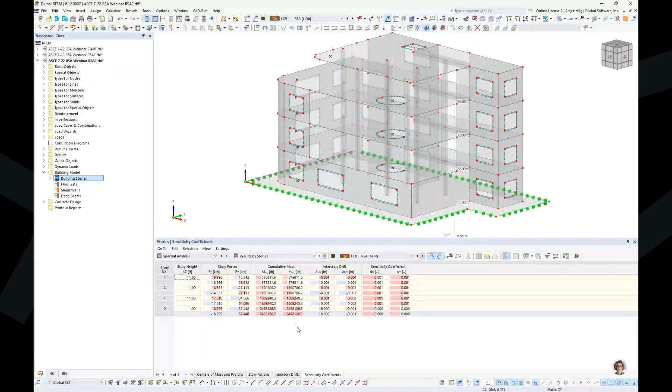I'll go back to the PowerPoint one more time to talk in more detail about this, because this all refers to P-delta considerations.

For this, we refer to section 12.9.1.6, which further refers us to section 12.8.7 for P-delta. Essentially, we need to calculate the stability coefficient from equation 12.8-18. The building model add-on is actually outputting this directly in those last couple of columns we saw. So this is really nice, very efficient - we don't have to manually calculate this for ASCE 7.

The code tells us we can completely neglect P-delta effects when this coefficient is less than 0.1. Now we need to further calculate the max stability coefficient according to the equation given here. When the coefficient given to us in the program is between 0.1 and theta max, we need to scale our displacements and forces by the factor 1 over 1 minus theta.

If we find that theta is greater than theta max, the code tells us we need to completely redesign the structure, as it may be unsafe. In our example today, we're well below the 0.1 value, so we can neglect P-delta effects. But if we were above this, but below theta max, we would want to apply this scale factor. So there are several different applications with this scale factor that may be considered within RFEM.

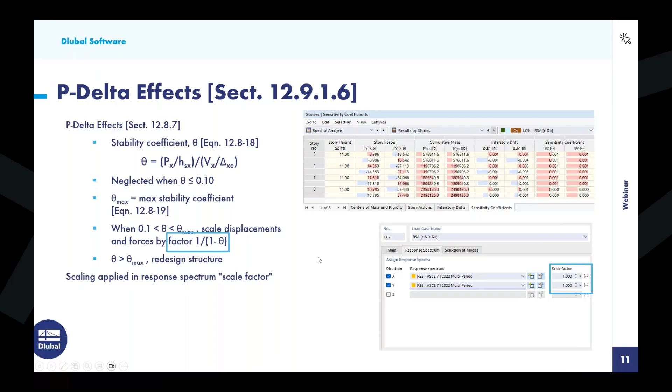Again, these are all hyperlinks provided directly within that PowerPoint handout.